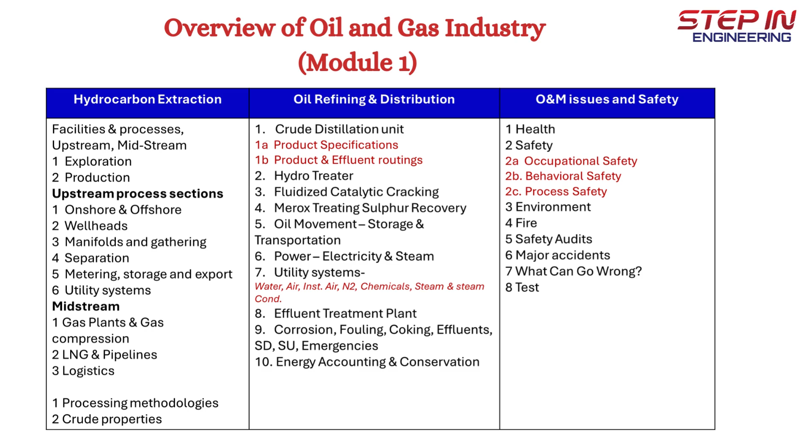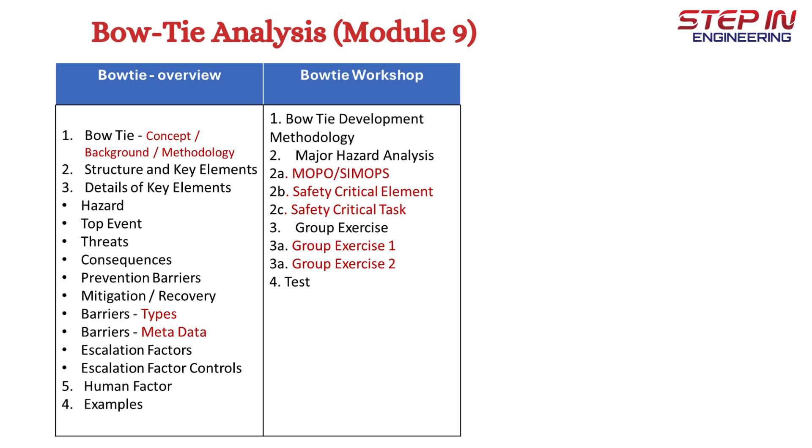Module 9 covers bow-tie development. It has 2 units. Unit 1 covers basic concepts, key elements of the bow-tie diagram and methodology. Unit 2 covers the details of each element and the development of the bow-tie diagram.

The participants can benefit by knowing what is HAZID, HAZOP and SIL. In HAZID study, we will focus on qualitative assessment of the hazardous consequences and likelihood of occurrence, evaluation of the safety measures,

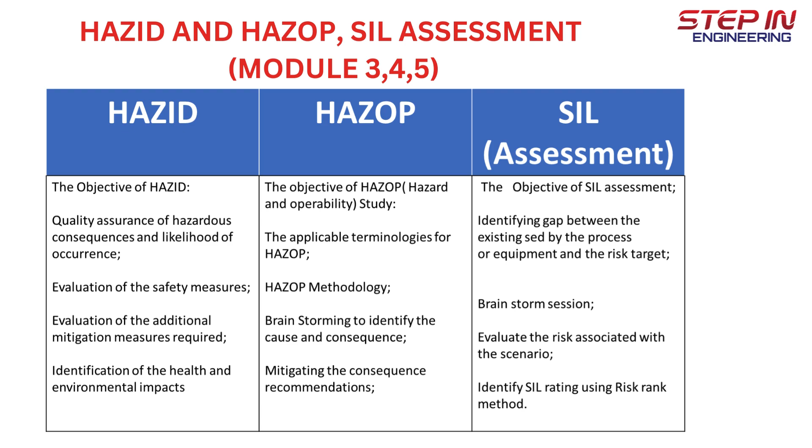evaluation of the additional mitigation measures required, and identification of health and environmental impacts. In HAZOP, we'll discuss the objective of HAZOP, applicable terminologies for HAZOP methodology, brainstorming to identify the cause and consequence, and mitigating the consequence recommendations.

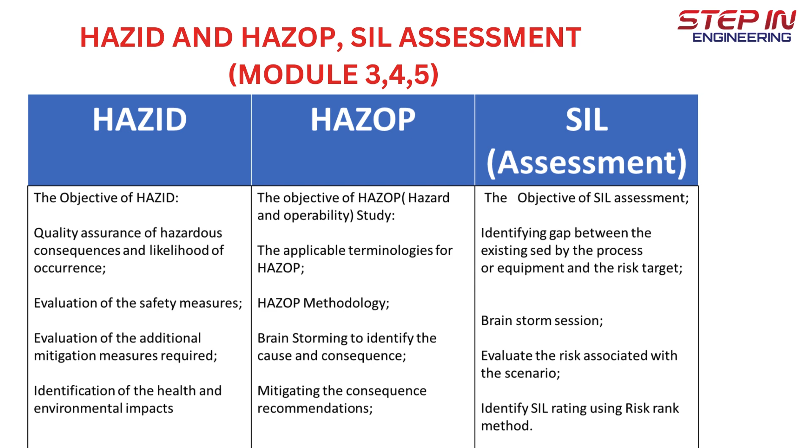In SIL study, we'll discuss what is SIL assessment, identifying the gap between the existing risk posed by the process or equipment and the risk target, brainstorm session, evaluating the risk associated with the scenario, and identifying SIL rating using the risk rank method.

Today we are going to see a small intro about SIL verification. So let us see what is SIL verification. SIL verification is a part of the life cycle of IEC 61511 standard.

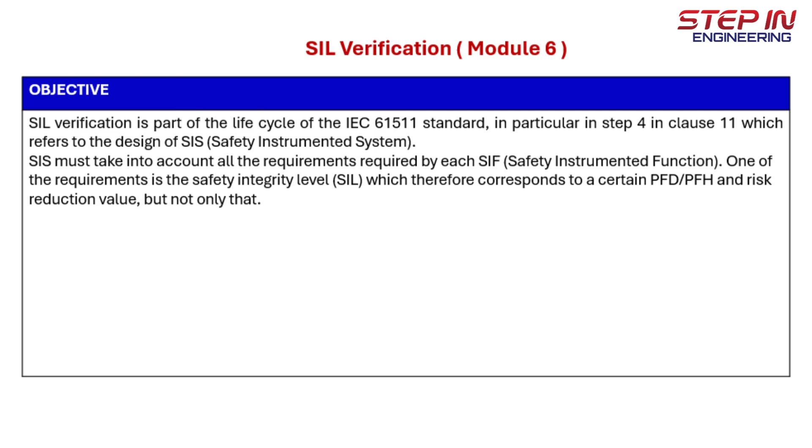In particular, in step 4, clause 11, which refers to design of SIS. SIS must take into account all the requirements required by each SIF. One of the requirements is safety integrity level, which corresponds to certain PFD or PFH and risk reduction values, but it also has other requirements which we will be seeing in detail in the course.

The course will cover the following: introduction to functional safety and life cycle, then principles of risk management, safety integrity level, 3 barriers to SIL determination - that is systematic capability, architectural constraint and PFD average - SIL verification methodology, introduction to Silver software, Silver software overview, and the software demo.

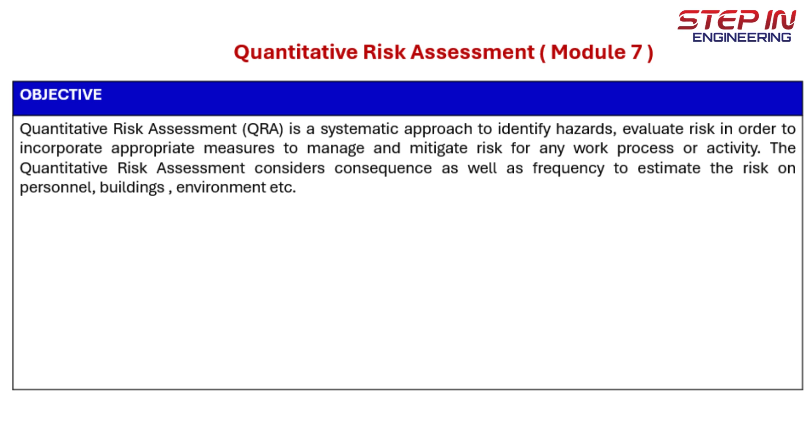Thank you, team. So a short intro about quantitative risk assessment. What is the quantitative risk assessment? It is a systematic approach to identify hazards, evaluate risks in order to incorporate appropriate measures to manage and mitigate risk for any work processes and activity. The quantitative risk assessment considers consequence as well as frequency to estimate the risk on personnel, building and environment.

The course will cover the following: definitions - that is hazard and risk analysis, risk assessment and risk evaluation - risk assessment approaches, what is QRA and the prerequisites to carry out a QRA, objective, strength and limitations, the methodology to do QRA, hazard identification, consequence analysis, frequency analysis, risk analysis, and ALARP and risk acceptance criteria, risk assessment, ALARP demonstration.

Then application of QRA and which softwares are generally used to carry out QRA, useful references, and an example in Aloha software. Thank you and hoping to see you soon in the training.

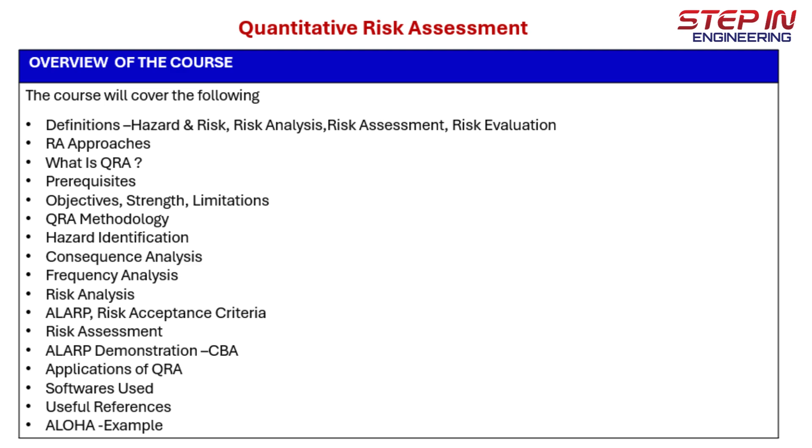Today a small intro about fire and explosion risk assessment. The objective of FERA is to identify and evaluate all fire and explosion hazardous events as a basis for risk reduction and for preparing performance criteria for essential safety systems.

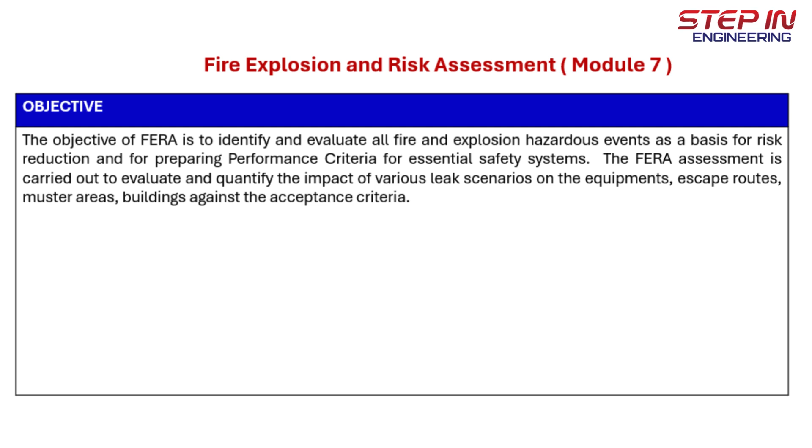The FERA assessment is carried out to evaluate and quantify the impact of various leak scenarios on the equipment, escape routes, muster points, and building against the acceptance criteria.

In the course we will be seeing the following important topics: what is FERA, what are the prerequisites to carry out a fruitful FERA, objective, strength and limitations, FERA methodology, hazard identification, consequence analysis, frequency analysis, risk analysis, ALARP and risk acceptance criteria, risk assessment, ALARP demonstration, applications of FERA, and then we'll see what softwares we use to carry out a FERA.

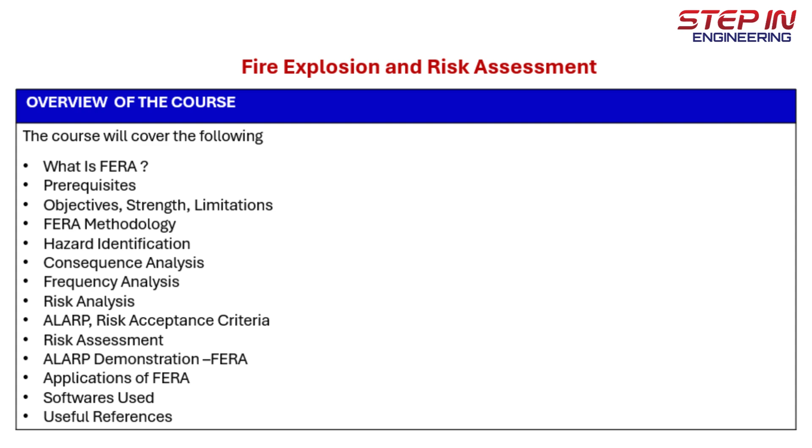And then useful references for your future projects and future endeavors. Thank you. Hoping to see you all in the training.

Thank you. So today, a small intro about HAC, hazardous area classification. The main objective of HAC is to reduce the likelihood of uncontrolled ignition of flammable and combustible material by electrical and instrumentation and hot surfaces that can lead to potential fire and explosion.

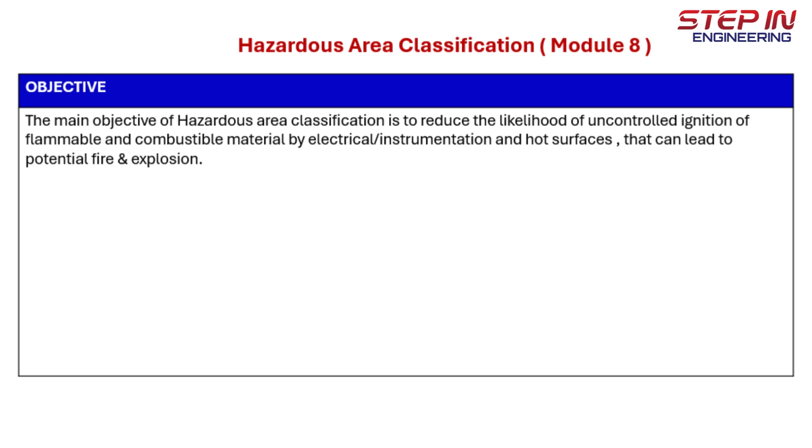So in the training we will be seeing the following: basics and importance of HAC, standards to carry out hazardous area classification, fundamentals of ignition and fire, methods to classify the hazard zone with consideration for material property risk in the plant, then the effect of ventilation

on the releases and influences on the hazardous zone, and practical examples using EI15, that is the code for area classification. Thank you. Hoping to see you soon in the training.